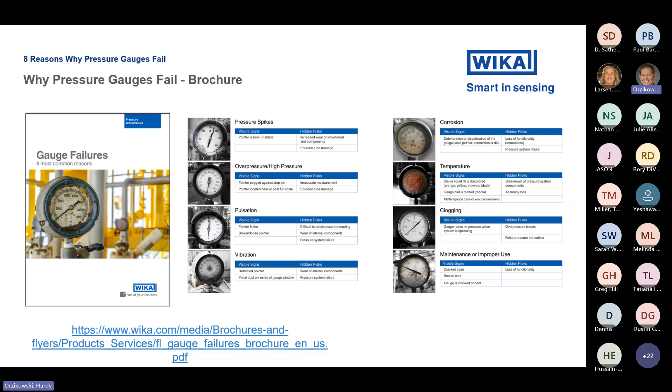This brochure indicates the visible signs and hidden risks. What the brochure does not cover are possible solutions to prevent these failures.

We also have blogs. One of the most popular is the 8 common reasons for pressure gauge failure. This is a blog at WIKA USA that probably has the most downloads. It's often used by people searching for solutions to problems in particular applications, which resulted in another success story, and that's what the second blog is about.

That was a CEO of a personal care company who contacted WIKA USA regarding problems reading a pressure gauge due to very severe pressure fluctuations and pointer flutter, after reading the blog about pressure gauge failures. So he contacted us and we were able to provide a solution that helped him in his process.

So in this presentation, we're going to cover mechanical vibration, pulsation, extreme pressure cycles, pressure spikes combined with overpressure, corrosion, temperature, clogging, and the lack of maintenance and improper use.

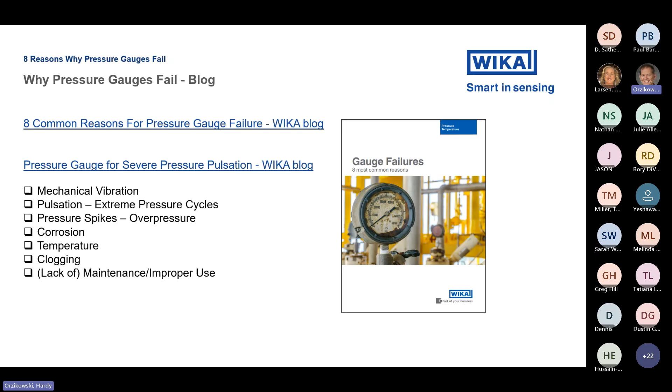Number one killer of pressure gauges in operations is mechanical vibration. What you will notice is high frequency, low amplitude, and erratic pointer movement. It's caused by vibrating equipment near the gauge, usually occurring from pumps or similar reciprocating equipment, and it obviously increases wear on movement and internal components.

And I have a few videos prepared, and you can see how severe the effect can be if that's going on for hours or days.

Other signs are a pointer falling off, metal shavings behind the lens. At one point we were asked to replace gauges at a Procter & Gamble plant. One of the applications was a conveyor production line producing diapers. Unaware of the actual operating conditions, we replaced the gauges with regular low-pressure capsule gauges, and after they were installed, some gauges failed within a couple of hours. So that's when we actually visited the plant to find out what was going on. The conveyor belt was sitting behind a large plexiglass window. All we had to do was touch the window and we knew what was going on—there was no way a regular gauge would survive those conditions.

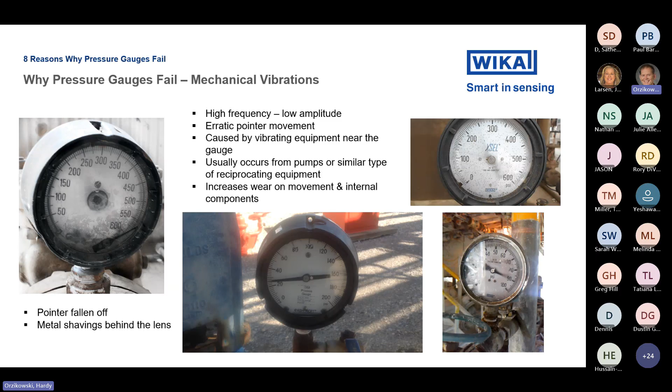These are pictures from actual gauge failures, and you can see the effect that severe vibration will have on the gauge internals, especially on the movement. You see worn pinion gear, worn segment gear. So that's all a result of the effect that vibration has on the internals.

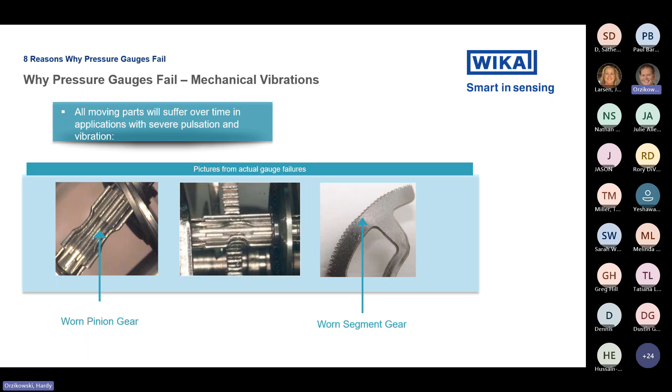Let's talk about the solution. The solution is case filling. The case filling lubricates and cools all moving parts. It eliminates the pointer flutter. It protects the gauge from environmental ingress. Here you see on the right-hand side an example of what effect you can have from environmental ingress.

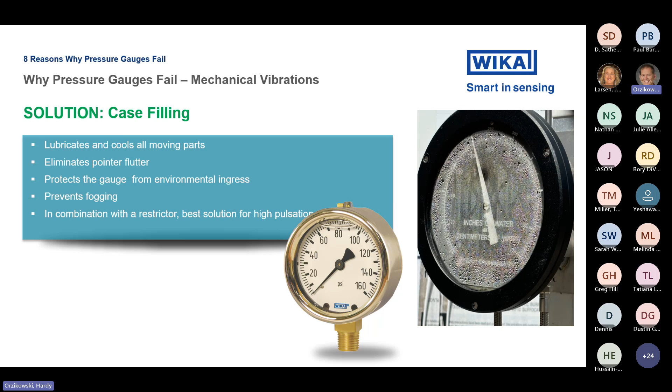Another solution is dampened movement. So here at WIKA, we actually have what we call an engineered dampened movement, fully encapsulated disc in a highly viscous media. So you see the picture on the bottom. The pointer shaft is extended through the bottom plate into a shell and attached to a disc. And that disc is fully engaged in heavy-duty silicone, heavy viscous silicone grease, 60,000 centistokes. And here you can actually see the pointer shaft.

The unique capsule design keeps the dampening media in and the dirt out. It's primarily used to eliminate the pointer flutter from vibration and pulsation, and it is recommended for applications where liquid filling is not permissible. One application I was involved with was gauges installed on ship barges operated in the Gulf Coast. We recommended a liquid fill gauge, but we were told they cannot install liquid fill gauges because if damaged, they can leak and contaminate the cargo or the environment.

And any type of spill must be reported to the Coast Guard. So for this application, we supplied gauges with a dampened movement. Another example would be for oxidizing agents, like O2 service. You cannot use silicone or glycerin case filling. You could use that very expensive halocarbon oil, but again, it's very expensive. So that would be another example where you can use a dampened movement over a case filling.

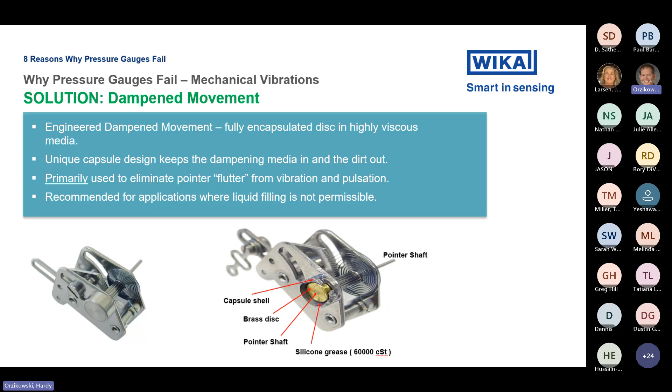However, you should not use a dampened movement in very severe applications. As I mentioned, it only reduces or eliminates the pointer flutter. It does not do anything to protect any other moving parts. The damping pot puts excessive load onto the movement, leading to early failure. It accelerates the wear and tear of all internal parts, and it reduces the lifespan of a pressure gauge.

So what you see here, the vibration caused a separation of the link between the Bourdon tube and the movement. Without the anchoring effect, the Bourdon tube continued to shake violently, eventually resulting in a stress fracture that you see over here.

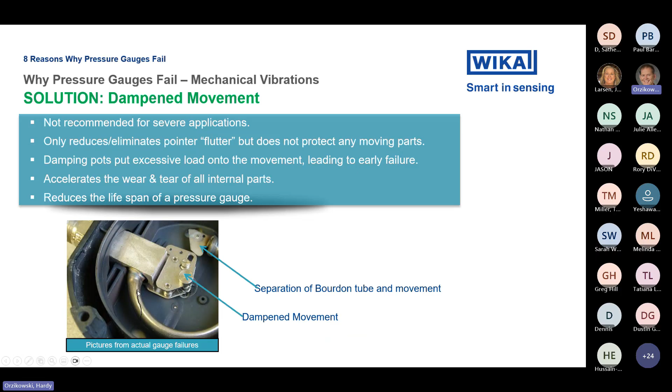The next failure mode: extreme pressure cycles, also referred to as pulsations. Compared to vibrations, the frequency is normally less than observed in case of vibrations. It's a relatively high amplitude, and it's a very rhythmic pointer movement.

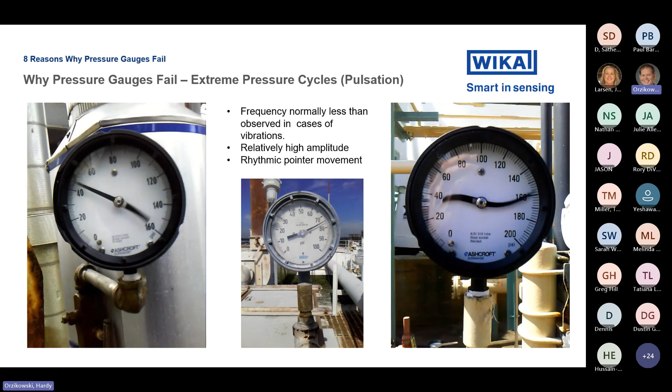Solution: the best solution to mitigate pulsations is the use of an internal restrictor or a snubber. A socket restrictor allows pressure to equalize slowly. It's an economical and low-cost solution. The case filling eliminates the pointer flutter, lubricates internal parts, and a restrictor will resolve most pulsation problems, but extreme pulsation could require accessories like an external snubber.

We have this one, a piston snubber. We also have adjustable snubbers. So there are different accessories that can be used to mitigate pulsations.

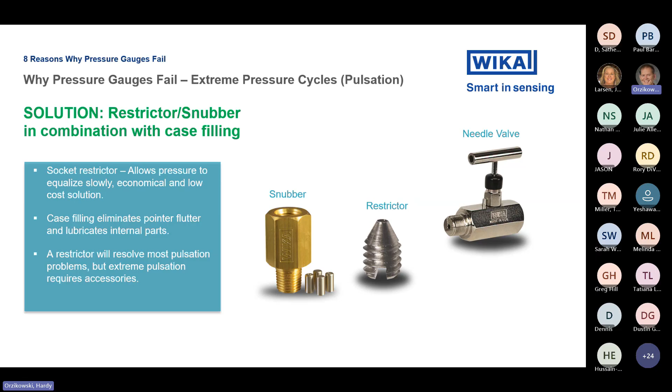Next thing we're going to talk about is pressure spikes, or over pressure. Pressure spikes, and I have a couple of pictures over there, can be caused by many things, but are usually attributed to turning pumps on and off, and the opening and closing of valves. Some pressure gauges exhibit either a bent, broken, or fishtail pointer. Here you see a fishtail pointer. A fishtail pointer is the result of a pointer hitting the stop pin with extreme force.

This is caused by the pointer hitting the stop pin on either negative or positive pressure with such a force that it bends or breaks the pointer. Here you have an example of the pointer broke off. That phenomenon happening here is also called water hammer.

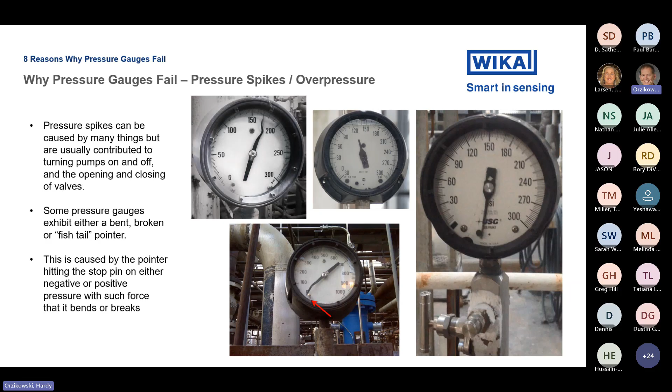Most of you are probably aware of water hammer. It's like a plumbing shock wave. So when liquid flowing through a pipe is suddenly forced to stop or change direction, like when you open or close a valve quickly, it creates a pressure surge. That surge can cause loud banging noises, vibrations, or even damage to pipes or equipment.

Here some points, like sudden valve opening and closing, that's what can cause it. Pump start or stop, pump power failure. Acoustic wave that moves at the speed of sound in water, about 4,700 feet per second. However, you can only have a potential water hammer when the fluid is moving above 5 feet per second. It creates an acoustic sound like a hammer beating on a pipe, and that's where the name water hammer comes from.

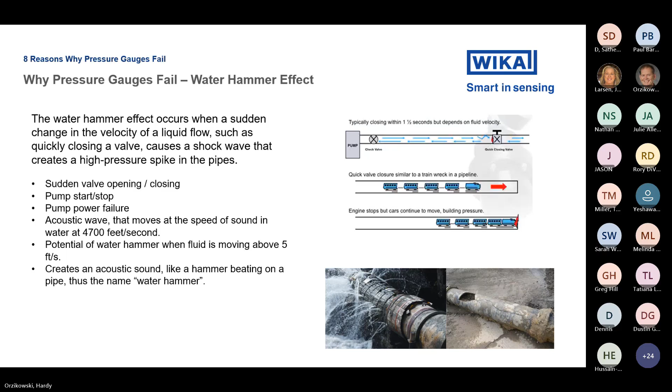The best solution to prevent pressure spikes or overpressure is an overpressure protector. An overpressure protector for pressure gauges is a device that automatically blocks or limits the pressure reaching the gauge when it exceeds a safe threshold, thus preventing damage to the gauge. It is typically set to full scale. It helps maintain accurate readings and extends the gauge lifespan by shielding it from sudden pressure spikes.

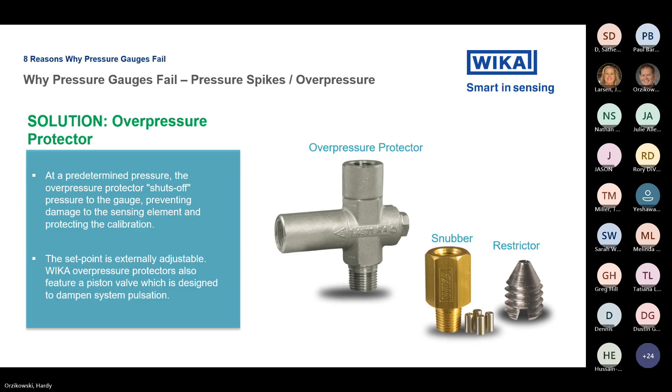Corrosion is another very common reason why gauges fail. You can have internal corrosion, let's say the wetted parts are not compatible with the media, or you can have environmental ingress, contaminates or moisture getting inside the case reacting with internal components, for example galvanic corrosion. Galvanic corrosion happens when two different metals touch each other in the presence of an electrolyte like water with salt, and then one of the metals starts to corrode faster than it normally would.

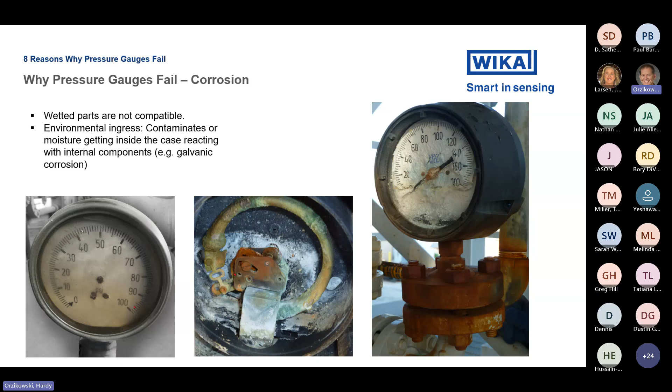The best solution for corrosion is a diaphragm seal, especially if the media is not compatible with a typical bourdon tube material, which is normally brass or stainless steel. A diaphragm seal is used in combination with bourdon tube pressure gauges to protect the gauge from corrosive, viscous, or high temperature process fluids by isolating the sensing element. It transmits the pressure through a flexible diaphragm, which you see over here, and a fill fluid, ensuring accurate readings while keeping the gauge safe and clean.

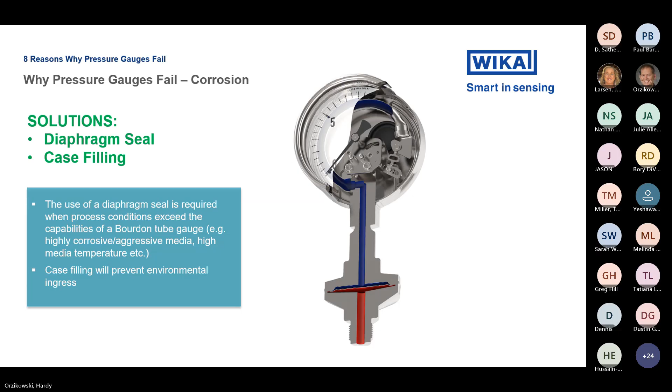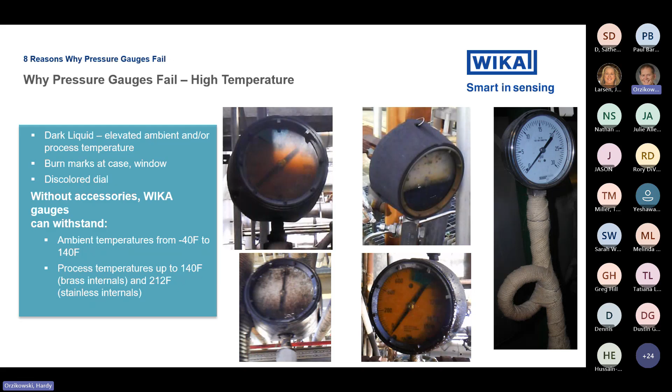So solutions are: diaphragm seal again, or to mount the gauge remotely away from the heat source, or siphons for steam service—and again, only for steam service, not for hot oil or any other hot media. An alternative to a traditional siphon is a mini siphon. The mini siphon is a lot more compact, it typically doesn't heat up as much as a siphon, and you have a deflection pipe inside the body where the steam hits the deflection pipe and immediately turns into condensation. We also have a whole line of mini heat adapters that reduce the temperature to a limitation that can be tolerated by the gauge.

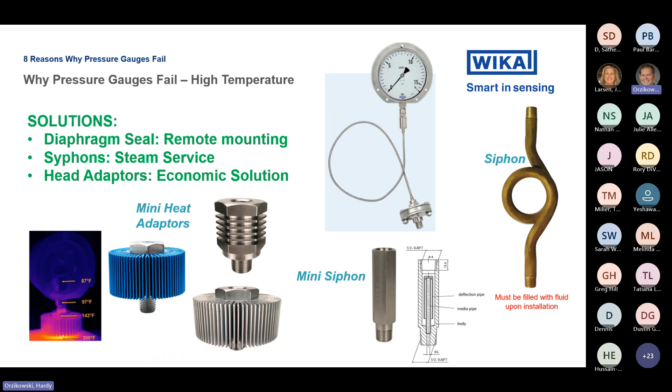Another reason why gauges fail is clogging. That can be easily observed if the gauge doesn't indicate pressure even though the valve is open and the system is operating. Obviously something is preventing the media from getting into the Bourdon tube. The socket inlet bore, or orifice, has been obstructed by highly viscous, crystallizing media, or particles and solids that clog the orifice and prevent the gauge from reading any pressure.

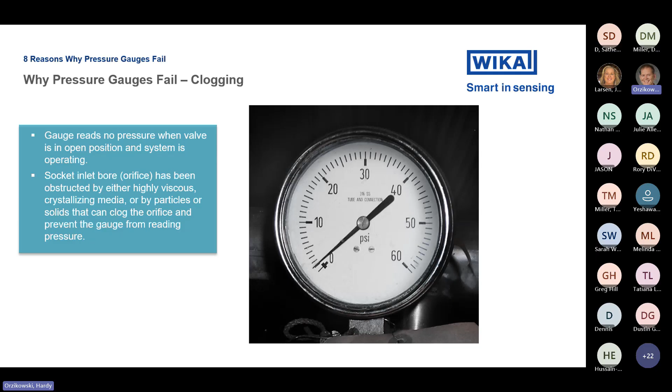So the solution, again, is a diaphragm seal, or what we refer to as a WIKA seal gauge. It's a diaphragm gauge, a mechanical gauge. The use of a WIKA seal gauge is recommended for low pressure applications that have a chance of clogging due to solids, particles, and viscous or corrosive media. Instead of a Bourdon tube, you now have a diaphragm, connected to the movement with a push rod, so the media only sees the lower housing and the diaphragm.

The seal gauge is available with female connection. You can have a 3/4 inch or half-inch female connection, or an open flange connection. The membrane and the bottom housing can be supplied with special materials such as Teflon, Hastelloy, or Tantalum to be compatible with aggressive media. So that's a really good alternative to the diaphragm seal.

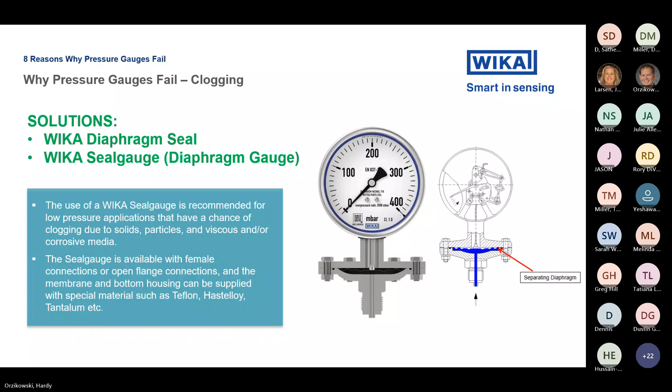The last reason why pressure gauges fail that I want to talk about is maintenance, or actually the lack of maintenance and improper use. A couple of examples: this one gauge was most likely hit by a large heavy object. You can see the case is bent, the window is shattered. Here's another gauge where the window is already broken, and this gauge is also missing fill plugs.

So gauges get installed or serviced without using the proper tools, or they get damaged by other objects. Visible signs can be broken lenses, cracked or bent cases, and as I mentioned, missing fill plugs and/or insufficient case fill.

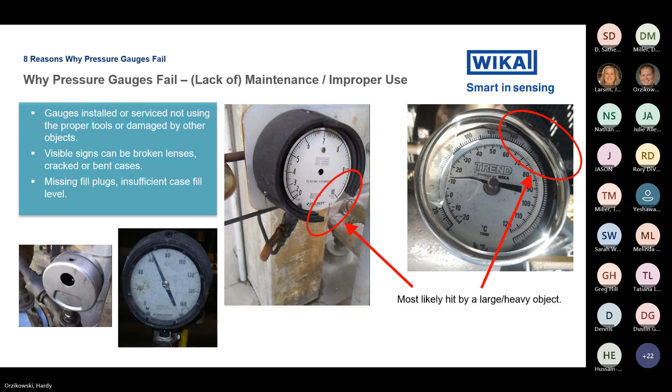The solution is actually common sense. Inspect gauges on a routine basis. Service or repair the gauge at early signs of distress, and always use the wrench flat to install the gauge. Don't grab it by the case and install it that way—you can twist it and damage the internals.

The WIKA XSEL process gauge is designed to be easily serviced in the field, and we offer spare parts that are listed in the operation instruction manual. I wouldn't recommend replacing the dial, but you can easily replace the back plate, the window, the O-ring, and so on. That's the membrane that comes with the back plate. And that was the last reason I wanted to go over.

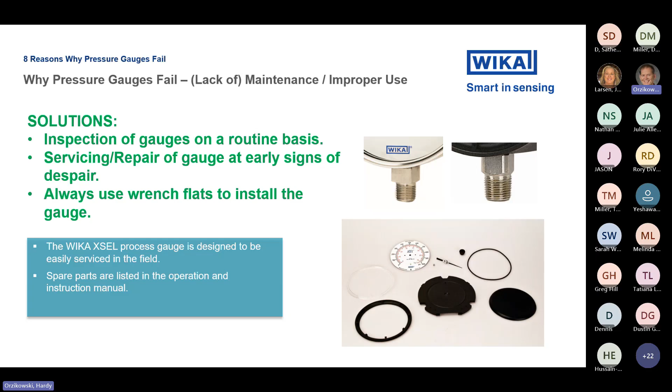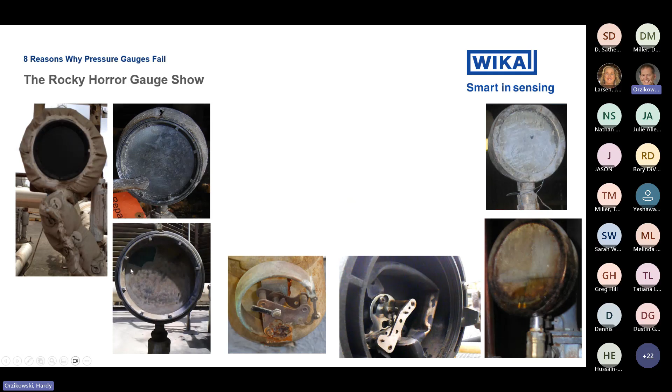At the end, I'd like to amuse you with a collection of some very scary looking gauges that we found during audits—I call it the Rocky Horror Gauge Show. You can see the funny one here: somebody actually drew the pointer on the outside of the gauge. In all honesty, some of these gauges are so severely damaged, or you could say decomposed, that it's almost impossible to determine the root cause of the failure.

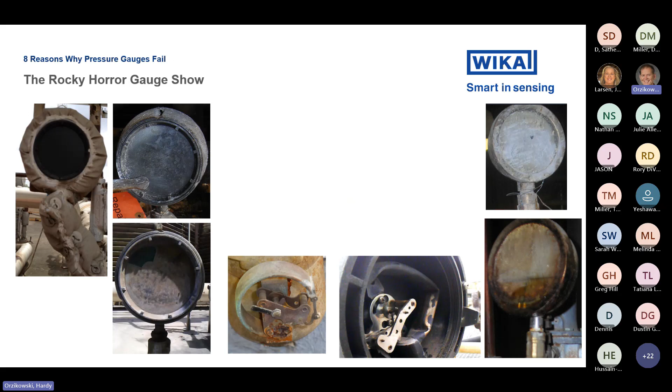That's the end of my presentation, and we do have time for a couple of questions.

Yeah, Hardy, we do have a couple questions come in. The first one: could you review the advantages of oval versus round Bourdon tubes, and does WIKA incorporate an oval Bourdon tube?

Okay, it's actually the pressure that determines the shape of the Bourdon tube. The higher the pressure, the more round the tube; the lower the pressure, the more oval the shape. The C-shaped Bourdon tube starts at 10 psi—the lowest pressure we can supply with Bourdon tube gauges—up to 1,000 psi. Then at 1,500 psi, we use helical shaped Bourdon tubes, and the tube for those is completely round. So again, the pressure determines the shape of the Bourdon tube.

Thank you, Hardy. And the next question is, what is the solution for process conditions where operating pressure is very, very less compared to the design pressure when you select the pressure gauge scale for operating pressure to be within the third of the gauge scale? And if you need to read that again, Hardy, you can click on your chat and it should be the last one. I know that was a lot.